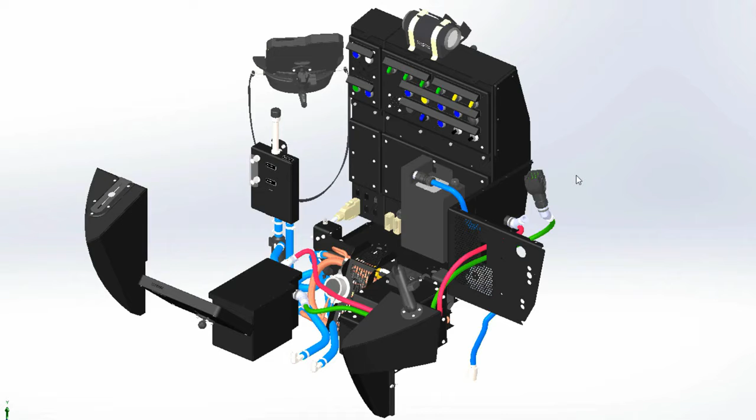When you go deeper into the beautiful unknown of the underwater world and rely on your power, oxygen, and navigation, electrical design plays a big role. In SOLIDWORKS, we bring multidiscipline engineering into one ecosystem.

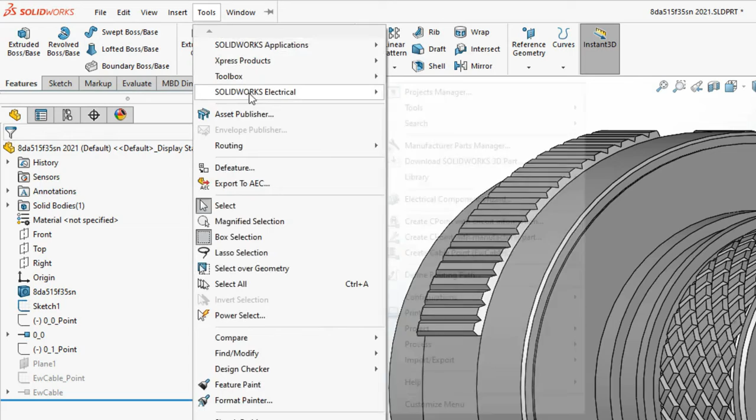Creating electrical information for a SOLIDWORKS part does not need to be a long, drawn-out process. Adding connection points in SOLIDWORKS became easier. They can be done inside SOLIDWORKS by going to Tools, SOLIDWORKS Electrical, where you can select Create C-Point with Manufacturer Part. In this dialog, it remembers the last manufacturer part that was used, or you can browse and select a different manufacturer part from an extensive library.

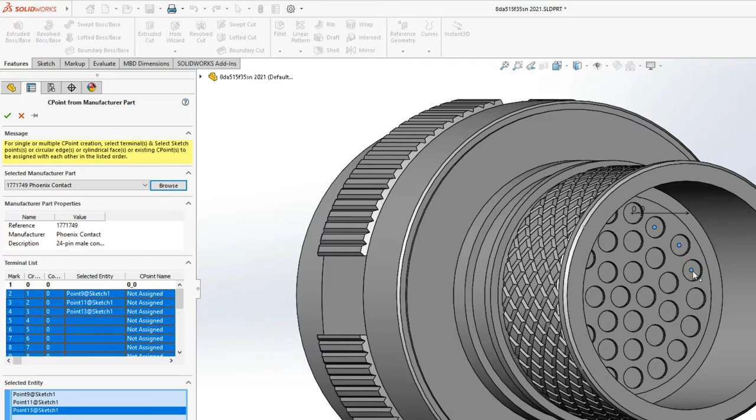The terminal list shows the list of connection points that need to be added. Selecting a point or an edge in SOLIDWORKS updates the table, and selecting OK will add these terminals to the part.

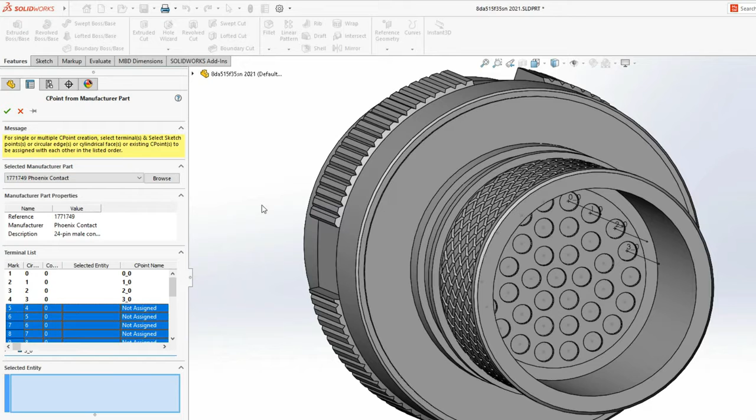Going back to Tools, SOLIDWORKS Electrical, Create C-Point with Manufacturer Part reveals what terminals already have been placed with the remaining list to do. The ability to select the point or an edge in SOLIDWORKS, to add the connection point with table updates, allows you to quickly create electrical components right in SOLIDWORKS. Less time creating parts and more time designing.

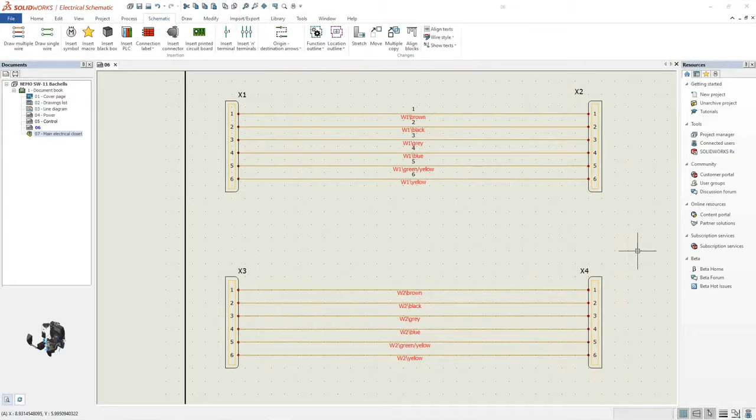How would you protect the junction between contacts and wires to eliminate electrical failures? Backshells are used, and SOLIDWORKS now supports them. Two harnesses from the battery to the control panel and external plug are created in SOLIDWORKS Electrical Schematic. In SOLIDWORKS, these two harnesses are routed. Now that the routes are in place, you can address the wires and contact protection.

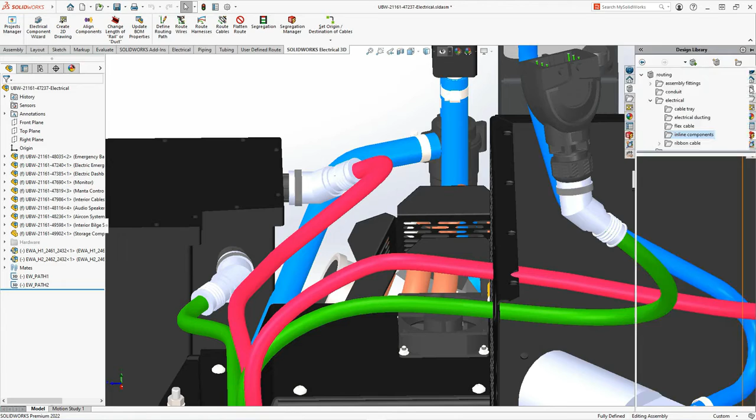Adding backshells to the connectors removes the stress between contacts and wires. Backshells are available in Design Library, Routing, Electrical, Inline Components. A 45-degree spin coupling was used and mated to the connectors. One more connector with a backshell will need an adjustment of the harness to go through the backshell.

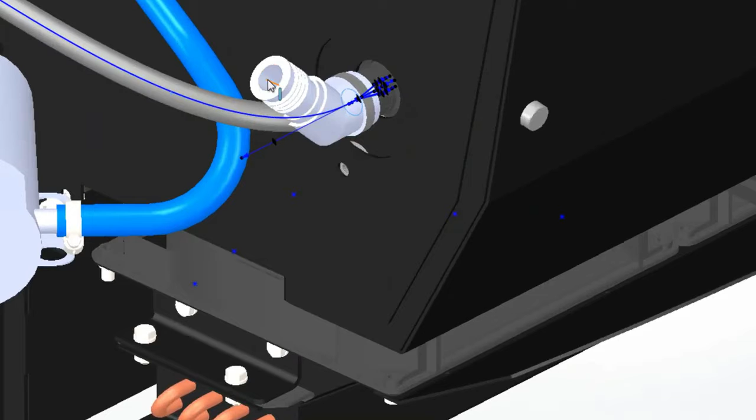Edit the harness that is in red and select the body of the backshell. From the right mouse button, choose Edit Route Alignment. Select the spline of the harness and then the axis of the backshell. Efficient use of backshells during design will protect the junction between contacts and wires, eliminating downstream manufacturing delays and costly redesigns.

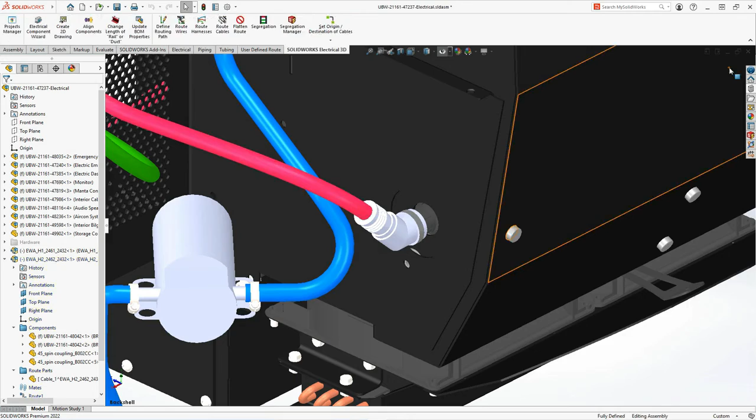Creating harness drawings and tables manually takes time and can be error-prone. Flatten Route in SOLIDWORKS automates this process and now supports backshells. Flattening this red harness will include backshells along with the harness and connectors in its 3D position, and will show them in appropriate locations. In the Flatten Route dialog, choose what detail of documentation you will need to include, like Manufacture, display 3D connectors, and checkmark for drawing options.

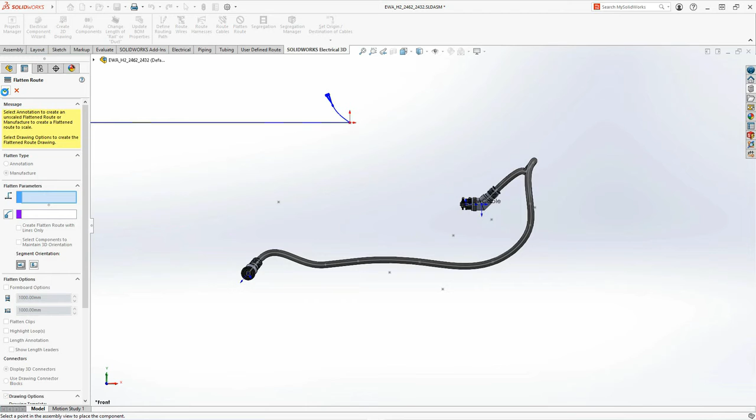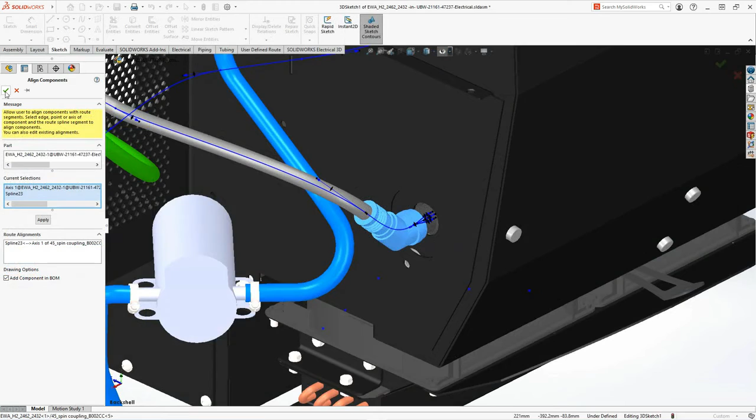Choosing OK produces the harness drawing with connectors, backshells, tables, and callouts automatically, and saves time for engineers to tackle other technical challenges. The SOLIDWORKS ecosystem lets you quickly create electrical information for components, add and manipulate backshells for contact and wire protection, and create flattened harness drawings that include backshells.